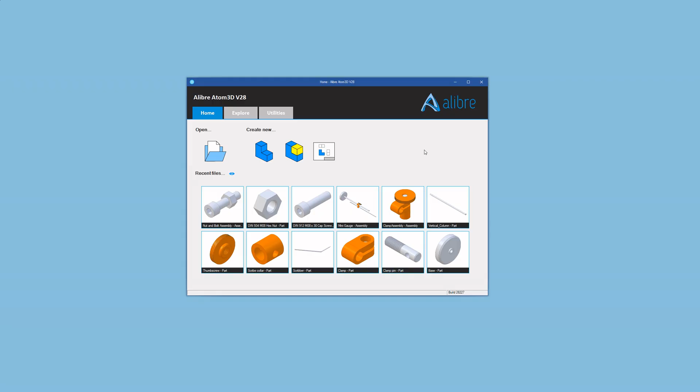Continuing our demonstration of Alibre Atom 3D, we're now going to model a hex nut. So to start this, I'm going to click on the part icon to go into the part workspace. Like we did with the socket cap screw, we're going to start with a sketch on the XY plane. So I'll just pick the edge of the plane in view and then click the Activate 2D Sketch button top left to go into the sketching environment.

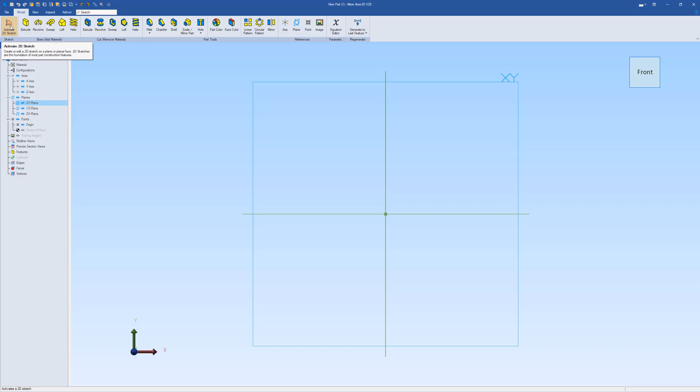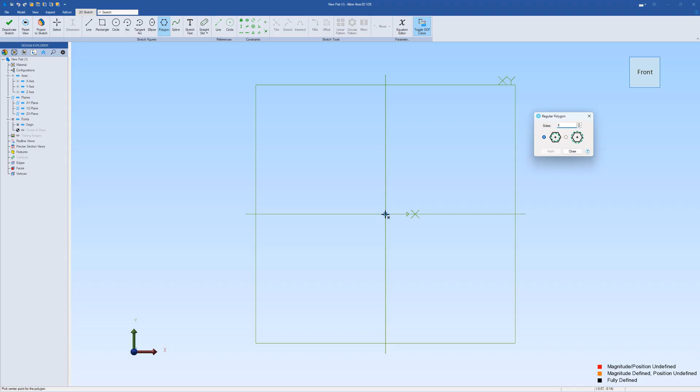And then from here, we want to draw a hex nut. Well, Alibre Atom 3D provides this useful polygon drawing feature. So I click on that. And then in here, we just need to set the number of sides. So in this case, it should default to 6. So I'll leave it on that. Now I can click on the origin point to center the hexagon I'm going to draw on the origin. And you'll see I get a little red guideline when I'm in line with the origin.

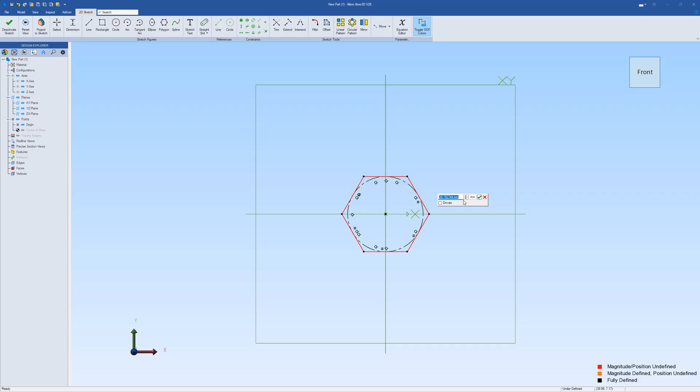So if I just drag up, that will mean that the top edge of the hexagon is horizontal. So I'll just left click and then hit apply, and then I can click close to close the polygon drawing tool down. I'm now going to use a dimension, and I can put a dimension between the bottom edge and the top edge of the hexagon. So this is going to be an M8 hex nut, so that is 13 millimeters across the flat. So just type in 13 and I'll just zoom in a little bit.

Now we could create this as a piece of material and then do a second sketch and use a cut feature to put the hole through the center, but there's a useful shortcut. If we put a profile within a profile, Alibre Atom 3D will give you the material between the two when you go to a 3D feature, so you can effectively cut a hole in it at the same time. So under sketch figures, I'm just going to go to circle.

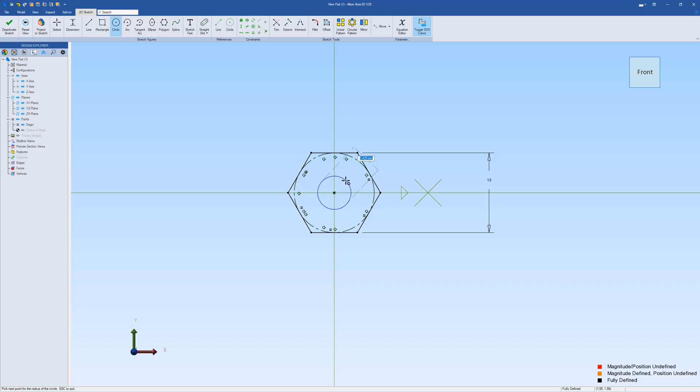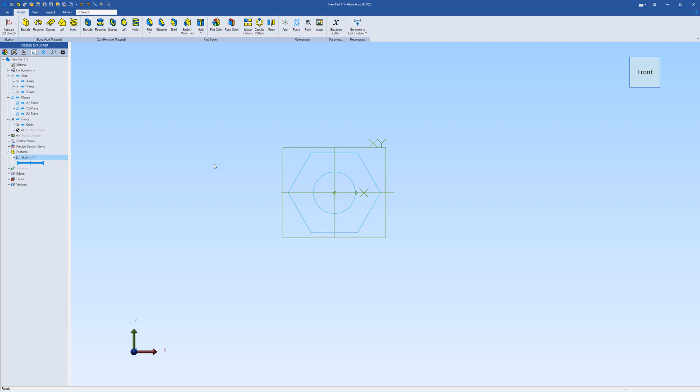I'm going to pick the origin as the center, and then for this, as we're not actually worrying about modeling threads or anything, I'm just going to put in a simple circle. I'll use the tap drill size, which for an M8 thread would be 6.8 mil. Press enter, and that's now a fully defined sketch. So I can click the deactivate sketch button top left, and I'm just going to rotate into a 3D view so I can see what's going on.

And so I've still got the sketch selected, so I'm going to go to the boss, add material menu, and extrude. And two things here. I want the depth to be 6.5 millimeters. I'm just going to click in another box in here so you can see that updates the preview. Now I could accept that, it would work fine. However, all the material is currently above the XY plane.

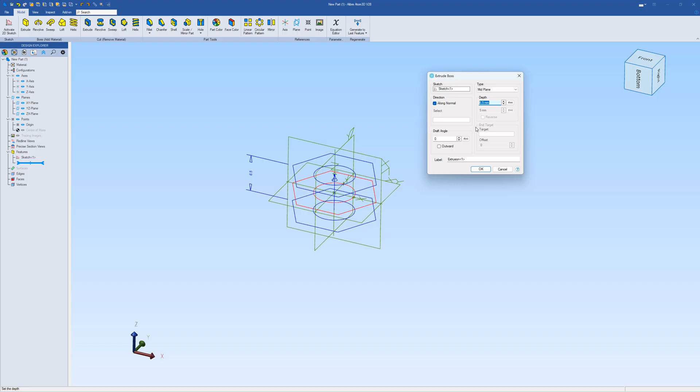So under type, I'm going to change this to mid plane, and what that's going to do is put the material evenly about the XY plane, which gives us a handy center plane running through the part. So if we were ever to need to have a mirrored feature on one side, we can use that as a mirroring plane. So it's just quite useful to work around centers. I'm going to click OK. So that's the basic body of the hex nut.

And the other thing we need on this is to put a chamfer, and we need a chamfer on both edges of the threaded section. So I'm going to go to the chamfer tool. The size for this should be 0.6 mil. And another useful little shortcut, I could select individually the two edges. However, if you pick a face using either the chamfer or fillet tools, the software will apply that feature to all edges connected to that face.

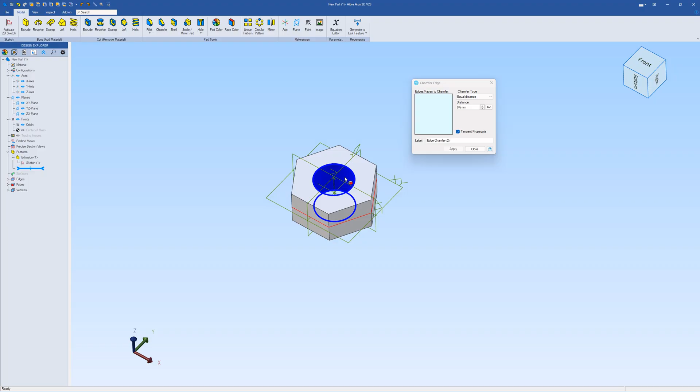So in this instance, if we pick the cylindrical face on the inside of the nut, that will then create chamfers both ends in one selection rather than having to pick the two edges separately. So that's what I'd like. I hit apply and then just hit close to close the tool, and that is a simple M8 hex nut.

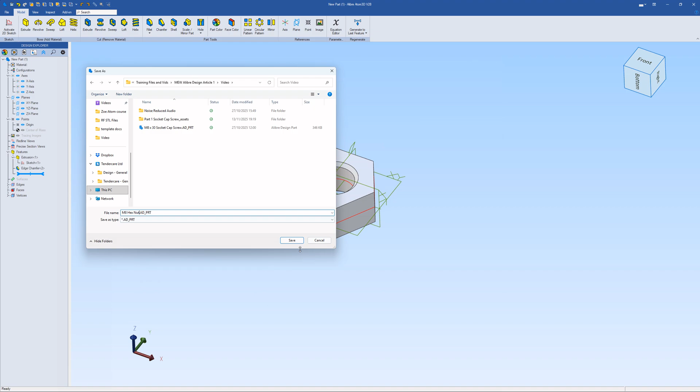So now I'm going to go to file, save, and I'm just going to save this into the folder with the other part we made earlier. So this is M8 Hex Nut, and click save. And with that done, I can now click the cross top right to close the part workspace down and go back to the Alibre Atom 3D home window.